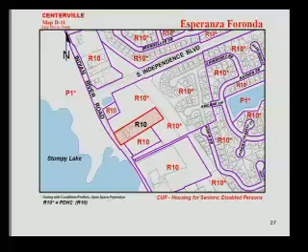The site is located just over 1 mile from the Hampton Roads Transit bus route, and as a result, the residents of this facility will not be eligible for paratransit services. These services are mandated by the Americans with Disabilities Act, and the official policy of HRT is to provide such services if it's within 3/4 mile from the bus route.

Transportation to shopping and other activities will be provided to the occupants by the operator of the facility. The use of the home for housing seniors and disabled persons in its current form as a single-family home ensures compatibility with the surrounding land use and adjacent residential development. The applicant is aware that any additions or expansions to the scope of the operation will require a modification to the conditional use permit. The applicant will continue to work with the Department of Social Services and the Planning Division for permits and inspections regarding state licensing and building code requirements.

Staff recommends approval of this request with the 7 conditions, which are agreeable to the applicant. Since they're agreeable with everything, Planning Commission thought it had favorable staff recommendation, and therefore we have placed it on the consent agenda.

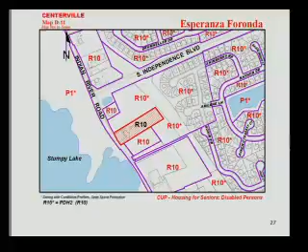Thank you, Commissioner Rosinski. The next item is item number 8. This is from the City of Virginia Beach, an amendment to the comprehensive plan policy document regarding Section 15.2 of the ordinance pertaining to designated growth areas.

Mr. Chair, members of the Planning Commission and city staff, my name is Brian Solis. I'm representing the City of Virginia Beach in this comprehensive plan amendment. What you have before you is an amendment to Chapter 2 of the comprehensive plan, the urban areas chapter, which speaks to the 8 strategic growth areas that Virginia Beach, and you, were very active drivers of from 2007 to 2013, to master plan 8 strategic growth areas throughout the city.

What this amendment does is align that proactive planning you've done in the past with what the state calls urban development areas, or in our case, designated growth areas—we're just calling them something different. This was originally a requirement in 2007; if localities had these UDAs, it was a mandatory requirement that they make this adoption to the comprehensive plan. In the 2012 General Assembly, they modified the state code to make this an optional requirement.

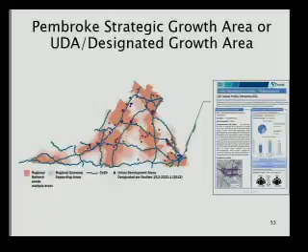So what we're doing is aligning our comprehensive plan to State Code Section 15.2-2223.1 that acknowledges that we have these 8 strategic growth areas. With that, staff recommends approval. I stand by for any questions you might have.

Thank you. Is there any opposition to this matter being placed on the consent agenda? You've heard the explanation, so we're finished with that matter. The next item, Mr. Chairman, is item number 9.

This is an application by Mark and Kenny Samtani and McCall 1602 LLC, a special exception for alternative compliance to the Oceanfront Resort Form-Based Code. The location is 1602 Atlantic Avenue, in the Beach Council District. I'm Bob Miller, representing the owners, and the revised item number 9 conditions are acceptable to the owners.

Thank you, Mr. Miller. Is there any opposition to this matter being placed on the consent agenda? Hearing none, the chair has asked Commissioner Mike Inman to review this application. Thank you, Commissioner Thornton. This is a request for a special exception for alternative compliance to the Oceanfront Resort District Form-Based Code.

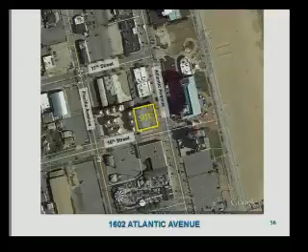That's a mouthful, you know. This is 1602 Atlantic Avenue, and the site is currently developed with a 2-story building which most closely follows the criteria for mixed-use building type as prescribed by the Oceanfront Resort District Form-Based Code, by having at least 2 stories and containing 1 or more commercial uses on the ground floor and a commercial use on the upper floor.

The applicant is proposing to demolish this existing structure and develop the site with a 9,500 square foot, 1-story commercial building.

As shown on the submitted drawings, which are up on the screen now, the exterior of the proposed building has been designed with the intent of being perceived as a mixed-use building type. However, by not truly providing 2 stories of use, but the appearance of 2 stories is provided, or providing outdoor amenity space, the proposal misses two elements which would primarily differentiate it from a mixed-use building and a commercial building.

Proposed building will meet the prescribed minimum height for a mixed-use building by being 25 feet tall for the majority of the site, and 34 feet tall along Atlantic Avenue.

The proposed materials include a standing seam metal roof, standing seam metal awnings, EIFS facades, and stacked stone. The proposed building elevations incorporate many of the recommendations of the Oceanfront Resort District design guidelines and will largely be perceived as a two-story mixed-use building by pedestrians using 16th Street and Atlantic Avenue.

The quality design of the exterior of the building will contribute to creating a great district with distinct identity, which is recommended by the Resort Area Strategic Action Plan.

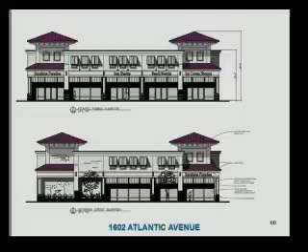We believe the proposed development of the site as shown on the elevations and as recommended by staff would lead us to put it on the consent agenda. And we reviewed the revised conditions in our informal session this morning and found them to be appropriate.

Thank you. The next item on the consent agenda is item number 10. It happens to be the same applicants, Mark and Kenny Samtani and McCall 2904 LLC. This is a special exception for alternative compliance to the Oceanfront Resort Form-Based Code. The address is 2904 Atlantic Avenue, in the Beach Council District. Bob Miller again, I represent the owners.

The new conditions are acceptable, and I just wanted to thank Christine and Karen this morning for spending time making sure we could work out the conditions, and thank the Planning Commission for putting us on consent. Thank you. You're more than welcome.

Is there any opposition to this matter being placed on the consent agenda? Hearing none, the chair has asked Commissioner Inman to also review this matter.

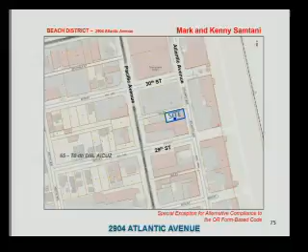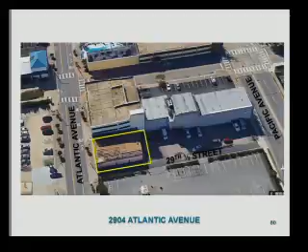Because I had such practice in the prior application, I got to do the second one as well. Again, as Mr. Thornton said, this is the same applicant as in the prior agenda item and is the same request, a special exception for alternative compliance to the Oceanfront Resort District Form-Based Code at 2904 Atlantic Avenue.

It is a very similar concept, but the building that we're starting with in this particular case is only one story as opposed to two stories in the other case. The design that is proposed accomplishes the same thing as in the prior application, the appearance of two stories, for the same reasons given previously. These elevations incorporate many of the recommendations of the Oceanfront Resort District design guidelines and will be perceived as a two-story building, and because of the excellent materials being used, it will help create a better district and distinct identity.

And therefore, with the conditions that were also discussed this morning and revised, we recommend it on the consent agenda.

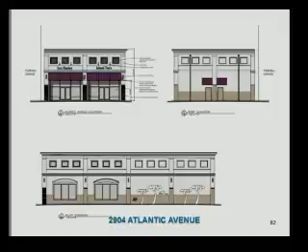Thank you. The next item is item number D2. This is an applicant from the owner of the property, Forefront Christian Church. This is a request for modification of a conditional use permit for a religious facility. The address is 2520 Holland Road, and it's in the Princess Anne District.

Good afternoon. My name is Scott Tuning. I'm with Pannoni Associates. I'm here representing the church, and we've reviewed the conditions, and we're good with everything that's listed. Okay, thank you, sir.

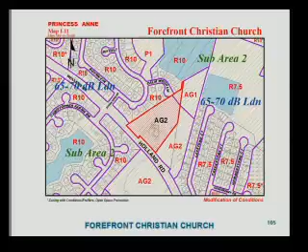Is there any opposition to this matter being placed on the consent agenda? Hearing none, the chair has asked Commissioner Karen Kwasny to review this application.

Thank you, Mr. Thornton. This is a request for a modification of a conditional use permit for a religious facility. The site consists of a one-story church building and 56 marked parking spaces. Portions of the site are currently gravel and accommodate overflow parking.

A conditional use permit for the existing church was approved by the City Council in 1995. Since then, there have been several requests for use permits and modifications to the use permits approved by City Council, two of which include allowing temporary portable modular structures on the site.

This request for a modification to the existing conditional use permit is threefold: a time extension for the portable units on the site, 7,000 square feet of additions to the existing building, and 105 total paved parking spaces.

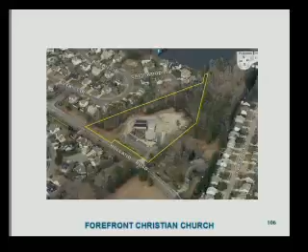The applicant has indicated that the church is in the midst of a fundraising effort to expand the sanctuary and classroom spaces. Currently, worship and educational facilities, including the existing portable structures and parking spaces, are insufficient to meet the demands of the church. The site is located within the Southern Rivers watershed and the suburban area.

Staff finds the extended use of the portable units as an acceptable interim solution to meet the needs of the church until an expanded worship and education center can be built. The submitted building renderings are, in staff's view, complementary to the existing church structure and will be an enhancement to the site.

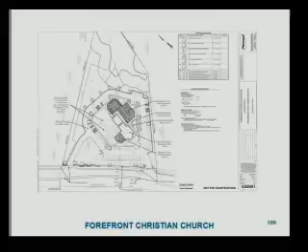The proposed parking lot expansion certainly appears necessary, as it is evident in the church's use of the unimproved grass and gravel parking areas surrounding the church. Based on these considerations, the Planning Commission recommends an extension to the time limit of the portable structures and approval of the church's building and parking lot additions as conditioned in the report.

Thank you, Commissioner Kwasny. Mr. Chairman, that was the last item on the consent agenda. I would like to move that items 1,

2, 4, 5, 8, 9, 10, and D2 be approved. Motion made by Vice Chairman Thornton. Is there a second? Second, by Commissioner Jack Wall. We are ready to vote.

Are we operational? Verbal? All right. Jack? Aye. Karen? Aye. I abstain from number 2. Aye. For what? Conflict of interest. Could you possibly be a little more specific about that? Just what the conflict consists of. Do we do general business with them? That's fine.

Aye. Aye. Aye. Aye. Aye. Aye. Aye.

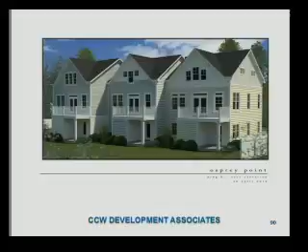The issues that were discussed at the meeting on Monday night, and I think had been previously discussed, I don't think answers were necessarily clearly given. The issues of access, water, and sewer, I'll start with those. Access is clearly provided by that easement.

It is clearly also the obligation of the developers of this property, the owners of this property, that they would be required to enter into a shared maintenance agreement for that roadway across Sea Oats' property, to share in the maintenance cost of that roadway moving forward when this property is developed, on a pro rata basis.

They also would be responsible for any damages to the road, if any is done during the construction of these units. There will not be any pilings driven during construction, so it's highly unlikely there'll be any damage, other than there is a potential, based on some things we were told, that there could be an issue with some of the sewer laterals in the private road if they're too close to the surface and/or if they're Quest piping, but that's an issue we'll have to deal with.

But there'll have to be a shared maintenance agreement with regard to the road, and we would be responsible for any damages done to the road during construction. Moving forward, that would also be an agreement we would have to enter into in writing and record, dealing with the ongoing maintenance of that road in the future and paying our pro rata share of the cost of doing so.

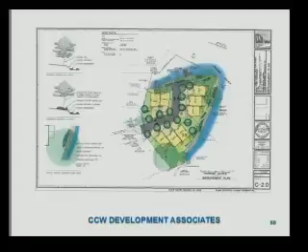The sewer is the other issue, the sewer pump station. Interestingly, the pump station was designed for 32 units for Sea Oats, and there actually are 37 or 38 units in there, and they had a lot of problems, we understand, with the pump station for many years, but recently the pump station's been upgraded with new, larger pumps put in, and they're not having any problems.

We will have to upgrade that pump station at solely my client's cost—larger pumps and potentially an expansion of the wet well, that will be determined by our engineers providing a proposal. They'll have the opportunity to review it with their engineers and the company that is maintaining the pump station.

We will enter into agreement with them that we'll be responsible not only for all the costs of the upgrades, but moving forward, the monthly maintenance costs. We'll have a pro rata share of those costs that this condo will bear, as well as long-term capital replacement costs with regard to the pump station and the street. Those will all be shared costs. Nothing's going to be, no burden's going to be placed on them beyond the burden they currently have.

And that's a requirement of the agreement. All the details aren't in there, but this property, with its zoning and its highest and best use, same as theirs, would have access to the pump station, to water, and to the road itself.

We've also agreed that, since it's a condominium, we'll have private pickup, not a large city garbage truck on site. That may wind up being the same company they use. I assume they have private pickup, but we will have to have private pickup for all of the trash removal, and we will not have a dumpster.

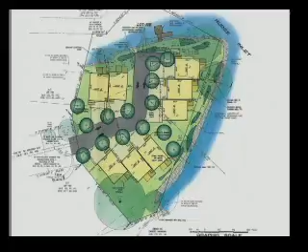There are 37 units today that use that road, and these additional 8 units are not going to overburden that road. The density of this development at 8 units is based on just the high land. From everything we've been able to ascertain, when the Sea Oats was developed, they used every square foot of land, including a number of half an acre of wetlands, to get the density—which these folks had nothing to do with—but the density is actually higher and the lot coverage is actually higher in Sea Oats than it will be in this development. Happy to answer any questions anybody may have.

Any questions for Mr. Badon? Thanks, sir. Thank you.

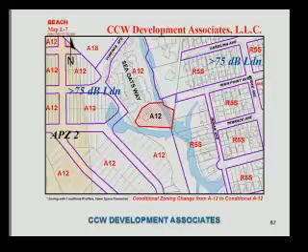As the gentleman in front of me spoke, there were some concerns that the community had regarding water, sewage, and maintenance of the road. Since our original meeting as a community, we had a meeting last Monday that was very nice. They communicated with us that they are going to take responsibility for development of that road, so the existing pipes underneath aren't affected during construction. They also put together a plan, at least discussed it, that addressed maintenance going forward and other concerns we had regarding the pumps being upgraded, things like that. So as long as those things are taken care of, I think the community will welcome them and look forward to it. As long as we know that's going to be taken care of, we're good.

Any questions for Mr. Markert?

I'd like to say something. I thought at your meeting on Monday, thanks for inviting me, and Ms. Oliver came along, that was just a great meeting compared to some others I've been in. There was no finger-pointing, everybody talked through the project, everybody was level-headed, and I just appreciate the way you guys have handled this. I do wish you had more information prior to Monday, because I know you had a lot of hearsay going on, so I wish that meeting could have happened even a month ago. But I appreciate your community, and it just goes to show why Chatillon, in my opinion, is probably the best neighborhood in Virginia Beach. But I'm biased. Thank you again for your willingness to work with the developer, and I appreciate you coming down, taking time off work to show your support for what they're looking to do. Again, thank y'all very much.

Ms. Oliver, Jeff, thank y'all for attending the meeting, and we're looking forward to the community growing the right way. Great, thank you. Thank you very much. I call that one a success.

Mr. Chairman, that's all the speakers that we have.

Mr. Burdon? I would also echo what you said, Mr. Chairman. I'm partly to blame for the meeting not happening sooner because of travel plans, I had to be out of the country. But it should have happened sooner, and that's on us. The discussion and everything was totally legitimate, and we will be working closely with them because we have to formalize these agreements before we can actually start construction, as Carolyn mentioned. As you all know, that will be months down the road. Thank you very much. Thank you.

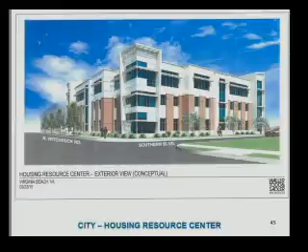It includes the following components: a day services center to assist currently homeless persons to access services and do laundry and take showers. This replaces the current Lighthouse Center. It provides central intake and assessment, a single entry point for homeless persons and those in danger of homelessness. 40 new beds of shelter for the single homeless, including dedicated beds for people with medical issues and flexible space to serve people of different ages and genders.

10 new flexible motel-style shelter rooms for families with children who are homeless. 30 new apartments for the single homeless, which will be rented and used as flexible permanent housing. A health clinic providing primary health services both for residents of the Housing Resource Center and of the surrounding community, coordinated by the Virginia Beach Health Department.

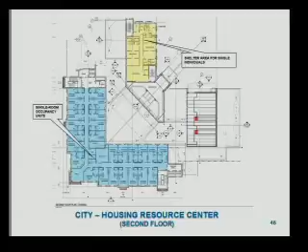Commercial kitchen and dining area to serve on-site shelter residents. A learning center to provide flexible classroom and meeting space for training classes and city and community meetings. 11,000 square feet of office space for the Department of Human Services, providing direct services both to residents and members of the community. And office space for our department and multiple nonprofit and faith organizations who will be providing services to the homeless there.

City Council authorized the purchase of this site in 2012 after a comprehensive community process of reviewing options to replace the Lighthouse Center. In 2013, Council authorized design funding, and this year in 2015, Council authorized construction funding. Comprehensive opportunities for public input on the site and on the facility were provided in the spring of 2012, spring of 2013, and spring of 2014, which included a design charrette for anyone interested.

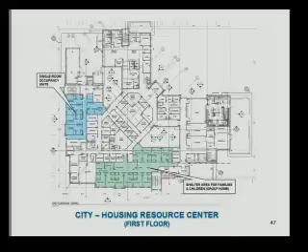When we designed the facility and worked with the architect, we stated the following principles, which I believe we have achieved. Number one, ensure accessibility of services for those who need them. Ensure that we can serve varied populations while keeping all attendees safe. Design according to the SGA design principles. Design flexibility into the facility so that future needs can be accommodated, and incorporate sustainable design and sustainable operational systems whenever possible.

In addition, since this will be a city facility representing a significant investment in the western part of the strategic growth area, we wanted the building to be a model for how future development should be done. I believe that, as proposed, the facility does all those things. I thank you for the opportunity to provide this info, and I'd be happy to answer any questions you may have.

Thank you. Any questions for Mr. Friedman? Your elevations look amazing. I'm going to get ahead of myself, but I can see a design award on that in 2018. Great, okay. Thank you.

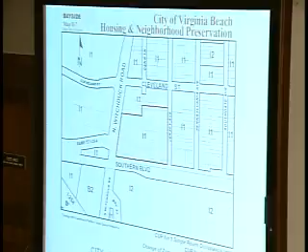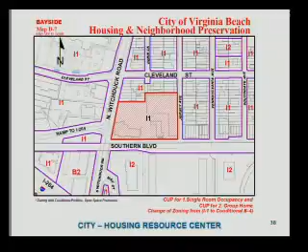Our warehouse is 13,000 feet. It is full of floor covering, carpet, wood, ceramic tile, vinyl, and pad. On a daily basis we have up to 10 crews who pick up starting at 7 o'clock in the morning, as many jobs as we can schedule every day, which is generally 5 to 8 or 10, as well as multifamily apartment business. And when that happens, the deliveries for the pad and the carpet accelerate exponentially to truckloads, 53-foot semi-trucks coming in.

Coming in on a daily basis, delivering that material. So starting at 7 o'clock, this is our warehouse right here. The direction of the semis come in here, they come down Jersey Avenue, they pull up, they back into our warehouse and unload. Typically, a 53-foot semi has 50 rolls of carpet.

If we were doing a multifamily project, we would take that in a few days in advance. We would rack it. We would send it out to the tune of 2,000 or 3,000 yards a day until it's done, that building is done. We have to supply the pad to go with that, as well as the vinyl or LVT or ceramic, whatever we're doing.

That's where the crews come in the morning to pick up, and they typically leave. They start at 7, they'll be gone by 9. They have to wait in line for loading, and we get them out as quickly as possible.

At that same time, we'll typically get a delivery because they're not scheduled with the work, they just come in before the work is scheduled. And we will have as many as 2 or 3 53-foot semis lined up here in line, waiting for this guy right here to get out of the way. At the same time, the 8 crews are vying, saying load me, so it's a real cluster going on there to get it done, but we manage.

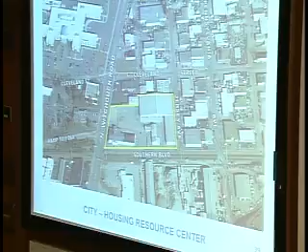So I'm proposing that this access to this property be redesigned to Southern Boulevard, with a feeder, an in-feed, to get the traffic coming in off the road back into their parking area, which the parking area for this whole design is right in here. This could be redesigned to allow access over here, hopefully easily, as opposed to this right here. This is going to be blocked, and it's going to be a mess.

And we require enough room to get our product in and out. And it goes on all day long until 4 o'clock. Then we do it again the next morning. So that is my issue.

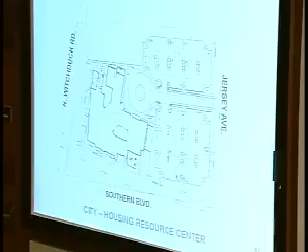I think the project's wonderful. I think it's great to be dealing with the homeless in this way. I'm impressed with the architectural designs. I think it's going to clean up the whole area, it's a plus for all of us. But I don't want to create another problem, or a worse problem, when in fact, if it's designed or redesigned and tweaked, that extra traffic can be handled without a cluster, a jam up. Thank you very much.

Any questions for Mr. Williams? Thank you, I do have one.

Andy mentioned something about the charrettes. This has been a fairly well-vetted project. Did any of you in the neighborhood go to any of those meetings, or know about those meetings? I was not aware of those meetings. I did.

We talked to an appraiser who came out, but of course he was talking to us. They're taking a piece of this corner of our building right here, and they're curb and guttering our property, which is no problem, we're going along with all that. But I was not aware of the design of this at this point, and nor did anyone contact us to talk about our traffic or point out a problem with it.

But once I knew that this was coming about today, I thought it would be prudent to come down here, and before the dirt starts to be shoveled, to possibly request a redesign or just move that access, because it will be a problem.

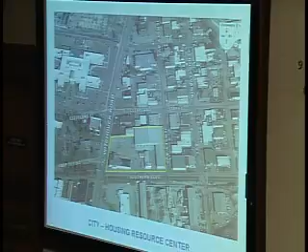I understand also in talking to the director of this project that they had tried to get access over here to Cleveland Street, and it didn't work out. But I had a short meeting with them this morning before we came in here, and we told them exactly what I just told you, and so we're going to go back and see what we can do here about the problem. But I think if we avoid that on the front end, it would be better for everybody.

Any other questions? Mr. Weiner. Yes. How many truck deliveries do you get a day? 2, 3, 4? 2 or 3 average, and as many as 5. But it's just, they go from 24-foot vans local up to 53-footers.

Any way possible you could schedule them to be before 9 o'clock in the morning? I would love that. I would love to get my material first thing in the morning, then I could do it same day. Typically, this material comes from Dalton, Georgia, as well, and it goes to Richmond and down, and when they come down and they offload in that distribution point there, they have 10 drops, and they'll schedule it out logistically, starting in Newport News and then Virginia Beach and Chesapeake.

So even though we requested first thing every morning, all of them, we get them up as late as 2 o'clock, which messes things up. If they can't get there by 9 o'clock in the morning, not till after 2 o'clock, we'd like to have some type of compromise here.

I don't see that happening with them. We've tried for years to try to just get it in. They just said, look, we'll get it to you when we get it to you. And we have no control over that, which makes it tough on us for our work.

Because a lot of our work is scheduled very quickly, next day, 2 days. So every day matters. And if they get it to me at 2 o'clock, it's too late to actually install it for the day because it's more than a day's work.

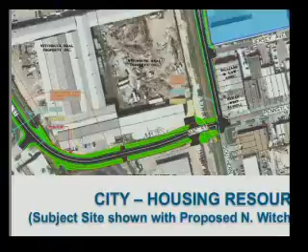I don't know what it's going to be. It looks like it's going to be landscaping or something. This plan doesn't show it. But what you're saying is your trucks are sort of queuing up along the side of that building now. Yes. That's been empty for several years, so it's easy to do. There's nobody bothering you. Exactly. And even if it were a going business today, the way it is, it would be no problem. There's a fence there. The street almost goes up to the fence, and parking is right there.

I think, I hear what you're saying. This is going to create a problem for you, and if it creates it for you, it's going to create it for everybody in the neighborhood. Maybe you all could sit down and figure out, maybe to widen Jersey on that side and put in some on-street parking. There's room there to do it. It would have to be temporary parking though, for loading and unloading. You'd see a sign that says unloading zone or loading zone. And that way your trucks would have a place to get out of the way.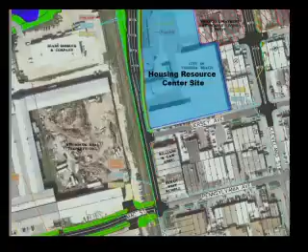The other alternative is, I want to ask Andy when we close the hearing to get him back. There's a large pull, whoever's got control of that picture, pull it down. The city owns the corner of Witchduck and Cleveland.

Yes sir, and that's not designated for anything. See those hatch marks? They're buying all that property. So that corner is going to be used for something, and you'll notice that Den Lane comes into the side of that property.

Maybe there's a way to get in there from Cleveland Street or use that corner for parking. That's just a question for him later. See that hatch mark? That's all going to become city property, and get bulldozed and turned into something. Right now there's a transmission business going on there, but all that's going to go away, that corner and across the street. Well, that would be ideal.

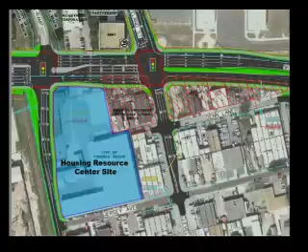Dr. White, I think, has something he can add right away. No, we're acquiring some of that, but matter of fact we just got a use permit application for the auto transmission place there, for them to relocate, or reestablish their operation on the rest of what's not being acquired. So we're not taking the entire site.

Is that hatch mark then not exactly accurate? Things are fluid, as they say, with this project as the acquisition phase is moving forward.

Any other questions for Mr. Williams? Thank you, sir. Thank you. Our next speaker is David Hutchins.

Good afternoon. David Hutchins. I'm in agreement with Mr. Williams about what's going on. We have an automotive shop, and we're also a state inspector facility.

So we get a lot of trailers from down the road, 19 to like 26-foot trailers, coming in all day long, sometimes 4 to 6 in a day. They come sporadically here and there, and they back in, and it's really short, you know, the width of Jersey Avenue right now. This is really going to be a problem for us.

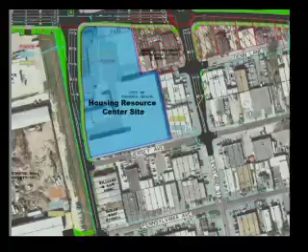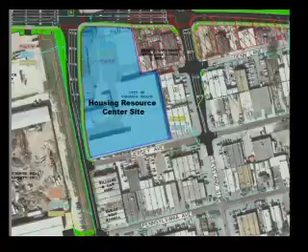And y'all did say something about maybe widening that road and putting some more parking in there, or maybe even at the right end of the facility, if they could make that come in around that corner so it's just an opening to come in, because you have plenty of parking set up on the facility now. If they make it more to the right-hand side where they could pull in, that's going to clear up his end of the street, and it's going to clear up me, because right now it's straight across from where I'm at.

So people are going to be pulling in, and Mr. Russo, he comes to our shop, he knows it's kind of tight over there. So he's pretty familiar with the area, and the way they have it set up is really going to be a problem.

This may be a question for Mr. Friedman when he comes up, but is the new parking going to be restricted to just that facility, or are businesses around going to be able to use that parking? And that's something we can find out.

Any more questions for Mr. Hutchins? Thank you, sir, thanks for coming down. There's no other speakers listed, I believe. Any other speakers that didn't sign up? Okay, Mr. Friedman, would you like to come back up?

Thank you. We had the opportunity to meet with Mr. Williams and Mr. Hutchins just before the meeting. We had not known of their concerns beforehand, and we would very much like to sit down with them. We plan to set up a meeting with traffic engineering, the architect, and the civil engineer for the Witchduck Road and Southern Boulevard project, and see if there's a way to engineer for this problem that we were not aware of.

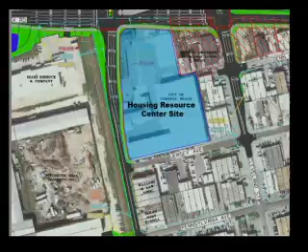So maybe a combination of widening Jersey and managing the truck traffic to some extent. Right. Might be a combination, okay.

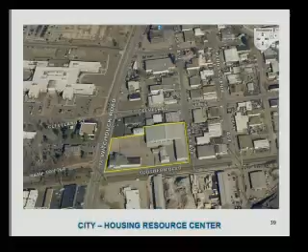Mr. Thornton? I was just going to say that the way you have your roundabout in there, it depends on whether the city's able to buy that property. If you could go from Cleveland to that cul-de-sac or roundabout and leave Jersey in, at least you'd have two ways in and two ways out, and it would spread the traffic around. But if the city doesn't buy that property, you can't do that. You can't put a road.

It looks like at Cleveland and Den, it's going to be an intersection with left turn movements there, based on what I see. But a lot of it depends - if you look at that carefully, you'll see there is an intersection plan there. It's awful close to Witchduck, but there is a left turn movement that connects you to Den on the north. Whether or not you get it on the south is anybody's guess.

So it seems to me if it turns out the city does get it, that would be a good place for you all to have another way into that site. But that's unknown at this moment, I guess. Sir, we agree with you, and as was said, we were hoping to get that property and have a second access point. So far, that's not been possible.

My question to you is, if we were to defer this today so that you meet with the engineers and these folks in the neighborhood, is that going to mess up your plans too much? Is having us hear it today that critical? Or could it wait a month?

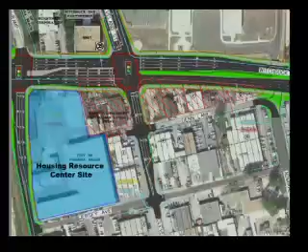There are some things we need to bring to their attention, like that piece of property everyone was discussing. In addition, that intersection at Den, we did discuss as an alternative at one point, but that impacts the property to the south that's hatched. That road, if built, would impact that building.

We'd have to do a demolition to part of that building, which we don't own. And those property owners are not interested in selling at this point either. So it doesn't impact just one property, it impacts both properties that would be along Cleveland.

When did you say you were trying to get in front of council? September 18th. Our next meeting is on the 9th. Then we could do it.

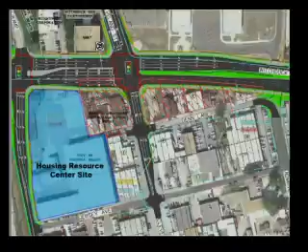We can do that. You could hear it that week, and we double advertise it so council hears it the following week. I think everybody here agrees it's a great application, and we want to see it successful. But I think they have legitimate concerns that, until just now, I didn't know about. We were not aware of that, and we're more than happy to work with them.

Okay, Mr. Russo. Getting back to Southern Boulevard, what is the problem with that being an alternative access?

The engineers that looked at that, and also during the charrette, that was discussed. But one primary concern was that it's now an intersection that would have the on-ramps and off-ramps, so you'll see a lot more traffic. In addition, there's the light rail and the potential for a light rail station down the street. So we wanted to keep that access as clean as possible.

Stephen, if you could show us the site plan again. It's kind of constrained as far as the location of the delivery portion of the building, not reasonably close to keep that open and provide access for trucks expected to come in on Jersey. It's pretty tight over there.

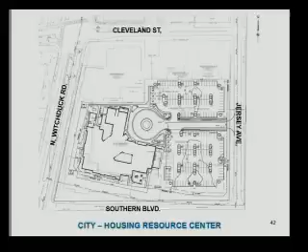I'm not saying it can't be done, but we're going to look at all options in these discussions. There may be some possible solutions.

Back to the charrette, this is for the future. When you have something like that, how is it these people didn't know about it? It would have been wonderful had they been there and had some input. Does that get advertised to the public?

They were advertised, not only in the newspaper, but also on our website. We did let some individuals in that area who had signed up previously, when we were looking at the Housing Resource Center's possible locations. They had signed up, and we contacted those individuals as well.

But were no letters sent to the surrounding property owners? There were letters sent to property owners. I am not sure which ones. Not Mr. Williams?

We regret that Mr. Williams and Mr. Hutchins didn't know about it. We thought it was widely covered in the newspaper. It was widely covered in the newspaper. I saw it in the Beacon many times.

This might be a question for staff, but could the ingress/egress be part of the site plan review, and we just approve it as it is today, let it go through to site plan review so they don't have to worry about coming back, and meet with them later? Or is that something everybody wants to see come back here so we can look at it before it goes to council?